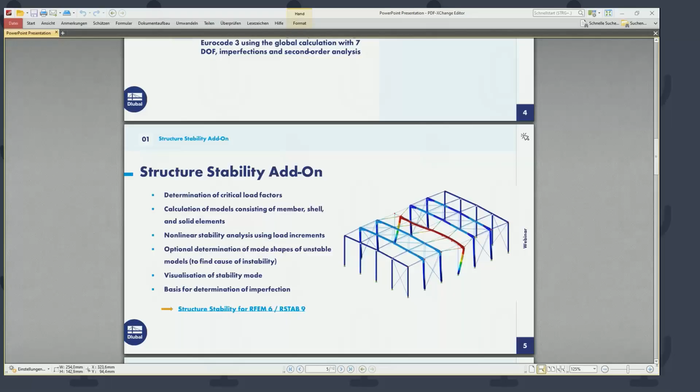Okay, thank you, Andreas. So we will start the presentation, and first I want to present the content overview. We are talking today first about the determination of the critical load factor using the structure stability add-on in RFEM. Then the second topic will be the consideration of cross-section warping in the global calculation using the torsional warping add-on for 7 degrees of freedom. And we also want to talk about lateral torsional buckling analysis according to Eurocode 3 using both add-ons in the global calculation, with 7 degrees of freedom, imperfections, and second order analysis.

So the first thing we want to look at is the structure stability add-on. Here's a short overview of the features of this add-on. We can use it to determine critical load factors for our structures and also calculate models consisting of member, shell, and solid elements. In this webinar I'm going to present members in the structure stability add-on, because we also want to show the combination with the 7 degrees of freedom calculation. I think shell elements and solid elements will be part of another webinar in the future.

Another feature of the structure stability add-on is the nonlinear stability analysis, using incremental loading to also calculate nonlinear systems. There's also an option which will help us determine a mode shape of an unstable model so that we can find the cause of the instability. We will look at this in the webinar today. We can also have a graphical representation of the stability mode shape and use it as a basis for the determination of imperfections.

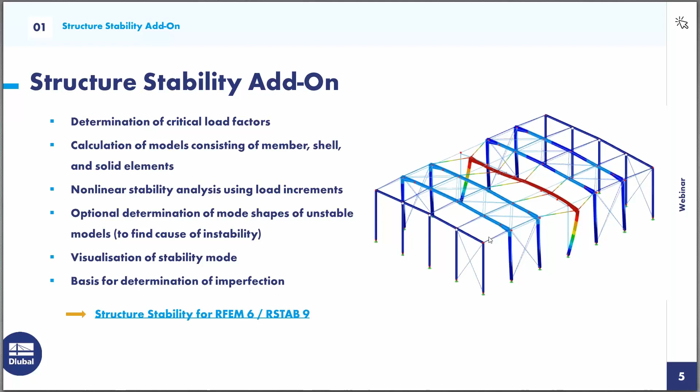In the first example, I want to use a simple example in RFEM to show you the basics of the input for the structure stability add-on, and which results we will get from the calculation. So I will switch to RFEM and we will have the first example. It's a very simple example in this case: a simple steel frame.

We have rigid frame edges and simple supports, and now we have one loading condition: vertical loading and a horizontal load. We want to look at all the settings that are necessary to perform a stability analysis with this structure stability add-on for this example.

First, if you want to use the structure stability add-on, we need to activate it in the base data dialog. So I go into the edit model base data dialog, and there we have a tab for the add-ons where we can activate the add-on structure stability. You've probably noticed that in the main tab of the base data, we have chosen the model type 2D.

So if we have chosen only this 2D model type, the structure stability analysis will also be performed in this 2D plane stress environment. So we will see in the first step only mode shapes for this 2D structure.

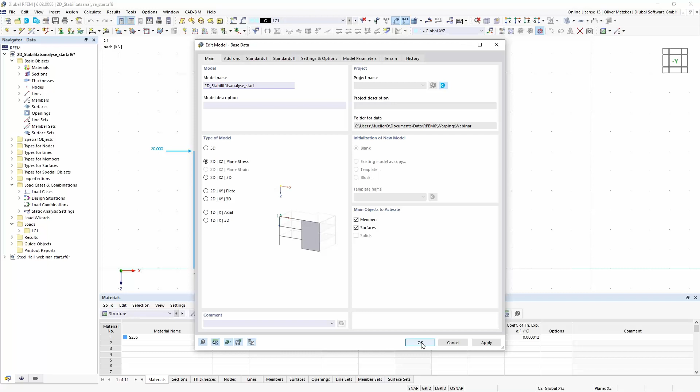Okay, so now I have activated this add-on, and we will see that in the navigator for the data, we have an additional stability analysis setting. Without the stability add-on, we don't have this setting, but now it's here with already two predefined stability analysis settings.

If we open the first one by double-clicking on it, we see that in this stability analysis settings, we can set all the options that we want to consider for our stability analysis. So we have as an important choice the stability analysis type.

We have this linear eigenvalue method for determination of the critical load factor, and also this incremental method for calculating nonlinear systems. In my example, I only want to use this standard eigenvalue method for the linear system, and I don't want to change the other options for now.

When we have our stability analysis setting, we can also assign it to our load case to start the structure stability analysis. So I can edit my load case number 1 just by clicking this Edit Load Case button, and then we see that if we have this stability add-on activated, we have an additional option here in the options, Calculate Critical Load Structure Stability Add-on.

If we activate it, then we can here choose in the drop-down list our corresponding stability analysis setting that will be applied for our stability analysis.

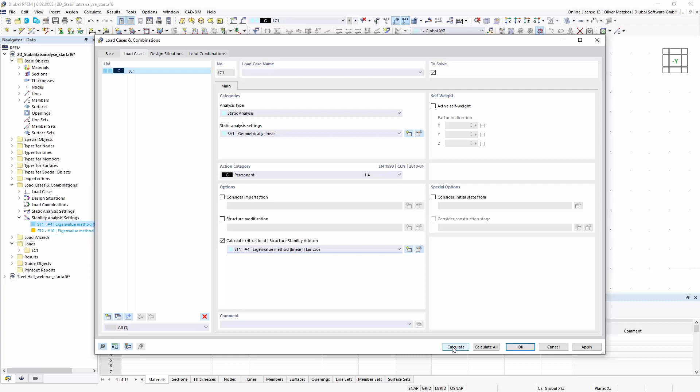If I calculate now my load case number 1, then we will see in the calculation diagram that first the static analysis is performed of load case number 1, and that is used as a basis then for the stability analysis. When we have calculated our load case number 1, we will get the internal forces, support reactions for the static analysis, and we can also switch to the results of the stability analysis.

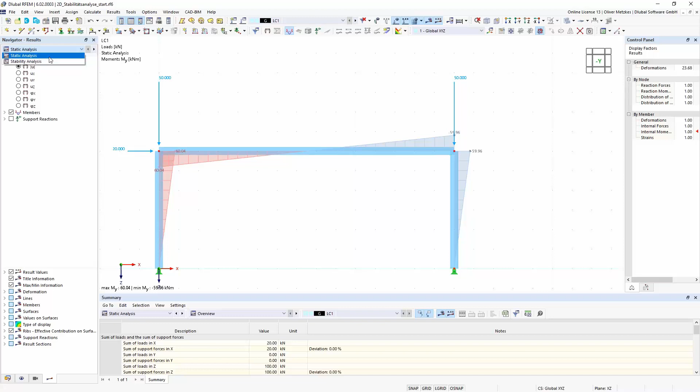In the navigator for the results, we have this drop-down list where we can switch between static analysis and stability analysis now. If we switch to a stability analysis, then we will see the graphical representation of the mode shape, and by default for the members it's represented by those line display.

We can also choose the display mode. Here in the navigator for the results we have options at the bottom, so if I choose to display my deformations for the members by colored sections, then I will also get this colored representation with the sections. That is mostly easier for the imagination of the mode shape.

I also get the results in the tables. So in the result tables for stability analysis, I will now see my critical load factor corresponding to the first mode shape. For this example, the first critical load factor is at 33.6. That means that if I multiply my load case number 1 with 33.6, then I will have the stability failure with this mode shape of my simple frame.

Okay, so that is the result that I get, and I also get further mode shapes according to my setting that I have set in the stability analysis settings.

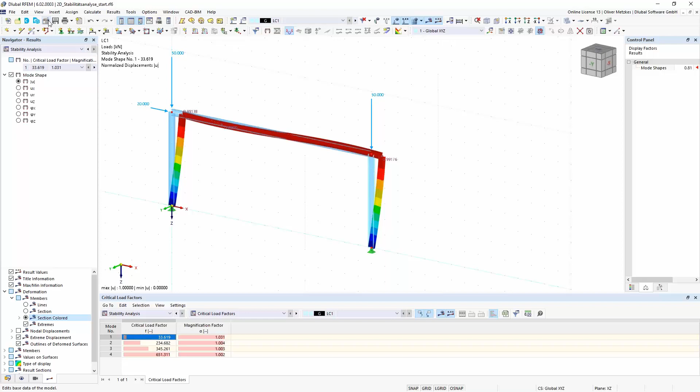Now, I have said that this is only a 2D structure. So the first mode shape is this in-plane flexural buckling of the frame, and I don't get any out-of-plane buckling shapes. If I also want to consider the out-of-plane buckling, then I can go into my base data dialog and change the model type to 3D.

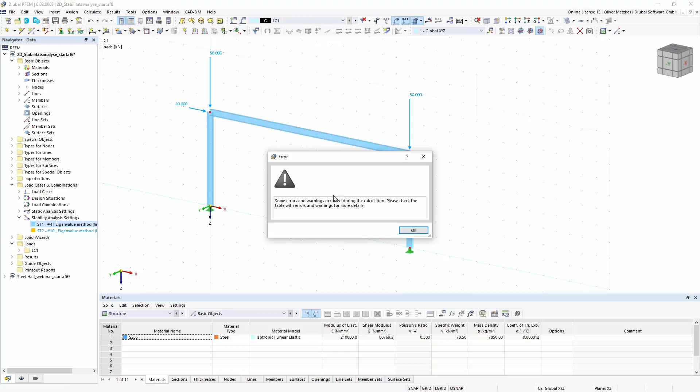I will do so. Okay. And then I can also just try to calculate it again. And then I will see I have not changed anything with my support conditions. So the result of the calculation in this 3D model environment now will be that there's an error because the structure is unstable.

So for my easy structure, it's very easy to determine the cause because I have not changed my supports. So I have the simple supports here, but I don't have any support in the out-of-plane direction. So for this case, it would be easy to say, okay, there are supports missing.

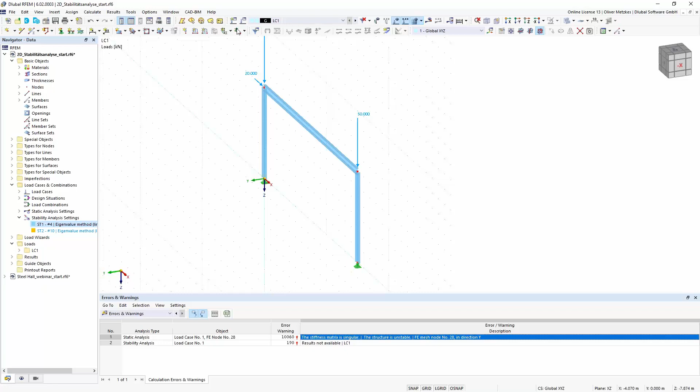But also if you have more complex models and you get this error for instability, the structure stability add-on can also be helpful. So as I have said in the overview, there's another option. If we go into the stability analysis settings, we have this option for the calculation without loading for instability check by mode shape. We can use this method if we think there may be an instability due to modeling issues, if maybe you have forgotten a support, or also if you have nonlinearities.

Okay, to check if it's maybe a modeling problem that your structure is not stable, like it is, for example, in this case. And as a result, you will get the mode shape of the unstable structure, and then you can easily see what the problem is.

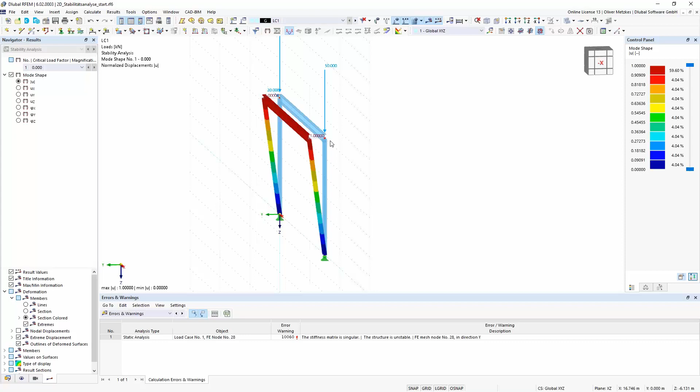So in my case, yeah, I don't have any support in the out of plane direction, so I will see that the frame will have a high deformation, and so there won't be any restraint, and it will not be a stable structure that can be calculated.

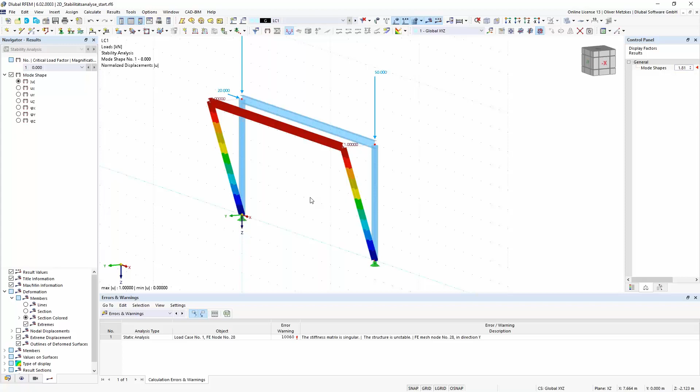This option is in the structure stability add-on, which can help with modeling issues involving instability. In my case, I just wanted to place some supports here, in the Y direction at the frame edges. So I select the Y direction and assign it to my frame edges, here and the other one.

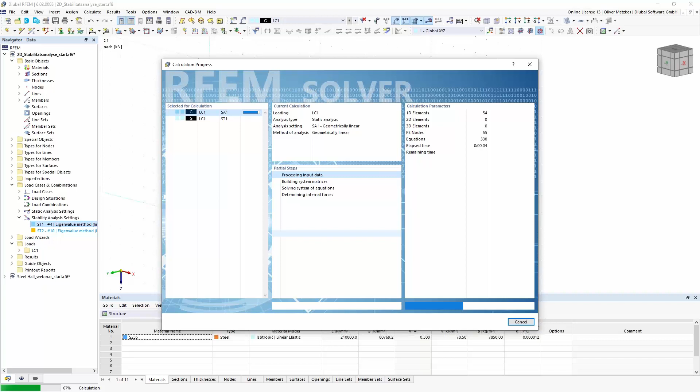Now I can change the setting back so that I calculate my mode shapes with loading to get the corresponding buckling shapes. I will calculate it again, load case number 1, now also in the 3D model environment, so I would expect to get out of plane buckling shapes as well.

I switch to stability analysis results, and now I see that the first mode shape is no longer the in-plane buckling, but out of plane buckling for the beam and also for the columns. For example, for this column, I now get this mode shape for out of plane flexural buckling with a critical load factor of 13.

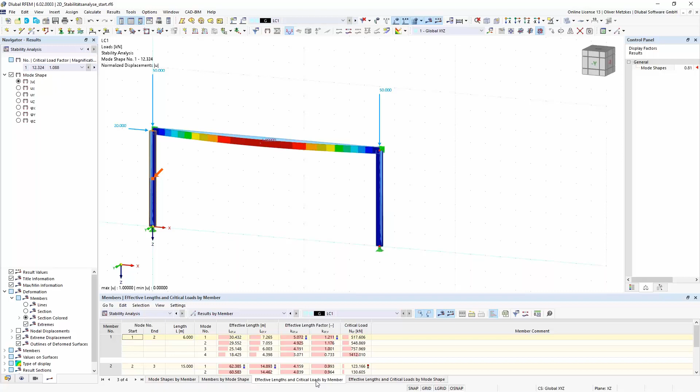The result of the stability analysis add-on is not only the critical load factor and mode shape, but also the calculation of critical loads and buckling length. If we go into the result table, results by members, we also get additional tables like effective lengths and critical loads by member. Using this load amplifier, the stability add-on automatically calculates critical loads for each member and determines effective lengths and, corresponding to member length, effective length factors.

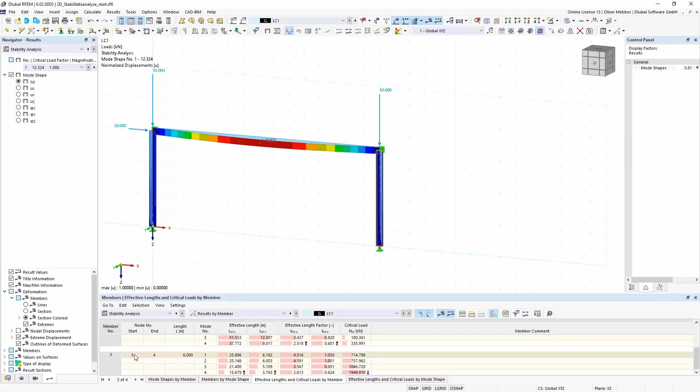For example, if we want to look at the effective length of this column, I click on it - it's member number 3 - then we have to look at results for mode shapes where this member is affected. Mode shape number 1 is for the beam, but mode shape number 2 is for out of plane buckling of this column.

As it is out of plane buckling, it would be buckling around the weak axis. We can display the axis system, so buckling around the z-axis, and the corresponding principal axis would be the v-axis. So we look at member number 3, mode shape number 2, and L critical V - an effective length of 6 meters, with an effective length factor of 1.0. That's as expected, since the critical length for this column with hinged support conditions at start and end would be the member length.

So this is the effective length for buckling around the weak axis. Buckling mode shape number 4 is still the in-plane flexural buckling, for buckling around the strong axis. So member number 3, mode shape number 4, and now it's L critical for the U axis - around 16 meters, with an effective length factor of 2.6.

These values could now be used if we want to perform stability design checks according to the equivalent member method, using these effective length factors for further design. So we get from the stability analysis result mode shapes, critical load factors, and effective lengths for the members - I think that's good. We've seen all this input on this simple example, and now I want to give you some hints about the behavior of the stability analysis add-on in a 3D model.

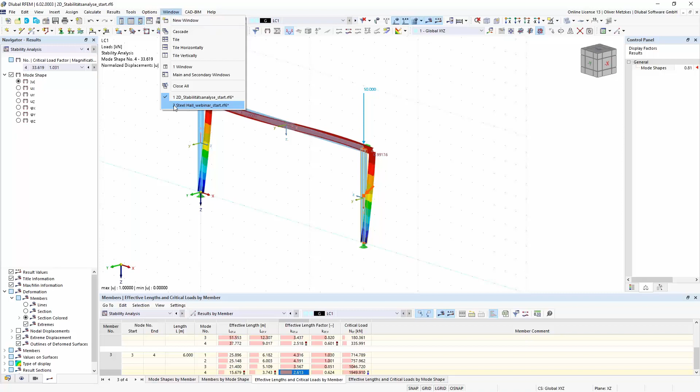So now I switch to my next model for this webinar. It's a steel hall with simple frames, rigid frame edges, simple supports, and a certain loading. I've simplified it a bit, so I only have self-weight and snow load, and wind loads only for one direction - I haven't considered the negative ones, for example. It's a bit simplified, but I think for our example today it's a good one.

Now you can also calculate critical mode shapes with the stability add-on for this 3D structure, with consideration of all the structural elements. So the whole structure is considered, and you don't need to consider any spring stiffnesses for members that aren't included, like the bracings - it's already considered in this 3D model with its corresponding stiffness. So we can have a look at it.

First, we would need to activate the add-on in the base data dialog - add-ons and structure stability.

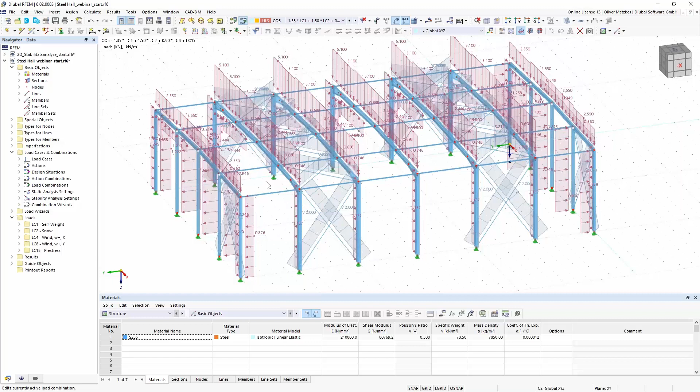Now we also have the stability analysis settings in here, and we can assign it to our load case. So if we want to determine the critical mode shape, we can select a load combination where we think we have the most governing load, like combination number 5. I can also activate this calculate critical load option for the structural stability add-on, so we can assign this setting to load combinations and not only to load cases.

So now, again, first static analysis of the load combination, then stability analysis using the internal forces that have already been calculated. Now we see mode shape number 1 for the critical load factor of 18 in load combination number 5 is displayed here.

So now that's only one load combination. For a structure with lots of load combinations, it would be interesting to find out the one that would be the governing one for the stability analysis. So the wish would be to analyze the stability of all the load combinations and not only one. That is also possible.

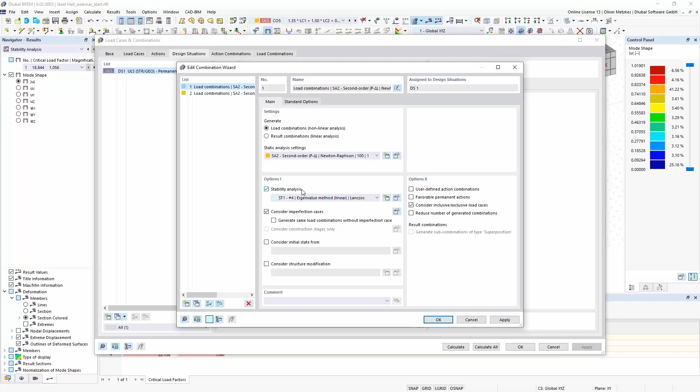We can go into the combination of the loadings, so design situations. As you probably already know, all the rules for the combinations are set into this combination wizard. We can also modify the combination wizard, and there's an option for stability analysis. With the activation of this option, we can also activate the stability analysis for all our load combinations created by this combination wizard.

So I will activate stability analysis and recreate my combinations. I set it here again. They are recreated, and we see now every load combination will have this calculate critical load option activated.

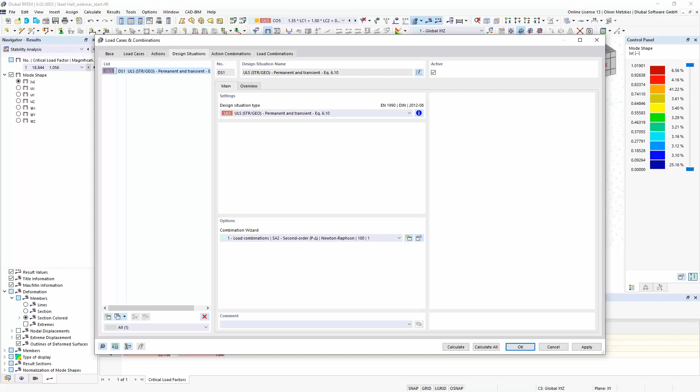If I now calculate my design situation number 1, I will get all the results of all the load combinations, so all the combinations will also be calculated by stability analysis. In the results, I don't have to look at each combination one by one, but I also get the results of the most critical load factor.

So we will also look at this result in the result tables. If I am in my design situation, in the summary of the static analysis, I will also have this additional line of minimum critical load factor. Now we see the most governing one is my load combination number 6, with a critical load factor of 11.1. Then we can look at combination number 6 and the results for the stability analysis.

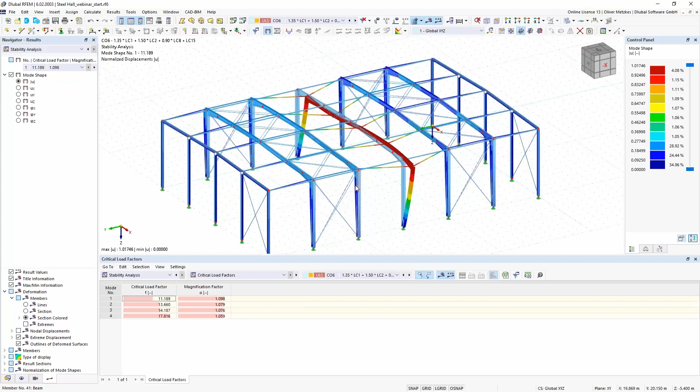And we will see that it's also this mode shape for in-plane flexural buckling. So that is the most critical stability issue for my load combinations present in design situation number 1.

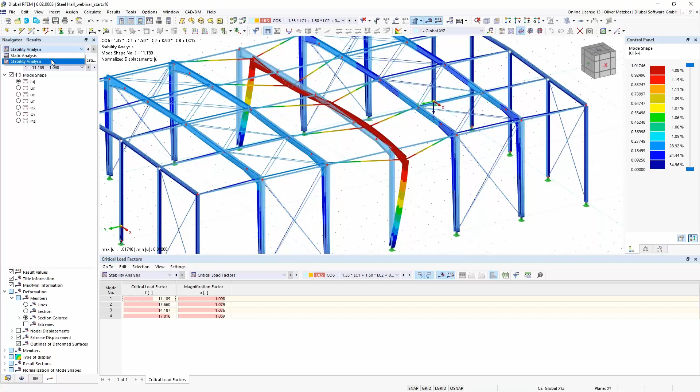Okay, if we look at this mode shape, we see it's in-plane flexural buckling. But when we look at the internal forces, we know that from our loading, so snow load, wind load, we also get a bending moment My. So we would also expect a lateral torsional buckling problem of our main beam, but we haven't seen this mode shape from the stability analysis.

The reason is that in our standard RFEM and RSTAB calculation, we only have this 6 degrees of freedom solver implemented. So for the stability analysis, we can cover flexural buckling, but we don't get the mode shapes for lateral torsional buckling if we don't have the additional add-on activated for the 7 degrees of freedom.

For a short overview about the possibilities, I want to show another page in the PowerPoint, okay, and we want to have a look at the stability failures of the members.

So as we already know, we have this problem or stability issue of flexural buckling. We have a compression force in the member, and as a stability mode shape we get this lateral deformation. There we have the critical loads, critical for buckling around the principal axis or the geometrically axis, so strong and weak axis, the flexural buckling mode shape.

But there are also other stability issues. We also have the torsional buckling mode, mainly an issue for cruciform members, for example. As a stability mode, we will get just the deformation around the longitudinal axis, so no lateral deformation.

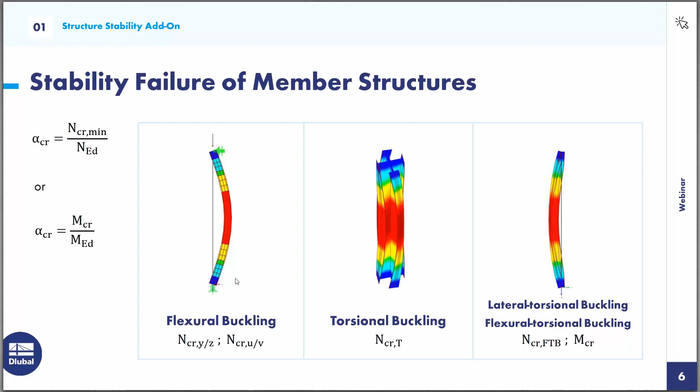So that leads us to our next topic, the torsional warping add-on, 7 degrees of freedom. In general, we can use this add-on to consider the cross-section warping as an additional degree of freedom in the calculation of our member elements. We can use it also in combination with the structure stability add-on, so that we can determine critical load factors and mode shapes for stability mode shapes like torsional buckling or lateral torsional buckling. The whole add-on is fully integrated in the programs RFEM and RSTAB.

Possible applications and use cases of this add-on are listed on this page. We can use it for all thin-walled cross-sections where we have intended high torsional moments, for example craneway girders, where we want to consider the torsional load so that we have primary torsion and secondary torsion. Then it's also used, this 7 degrees of freedom add-on, for the calculation of lateral torsional buckling according to the standards for non-doubly symmetric cross-sections.

For example, for channel sections, we can't use the equivalent member method according to Eurocode 3. So we would need to consider the lateral torsional buckling problem by using second order analysis with 7 degrees of freedom and also consideration of imperfections. We will also look at this problem of the lateral torsional buckling check later. And we can also use this add-on to consider it in the stability analysis of the global model so that the stiffness of all the connected structural elements is considered correctly.

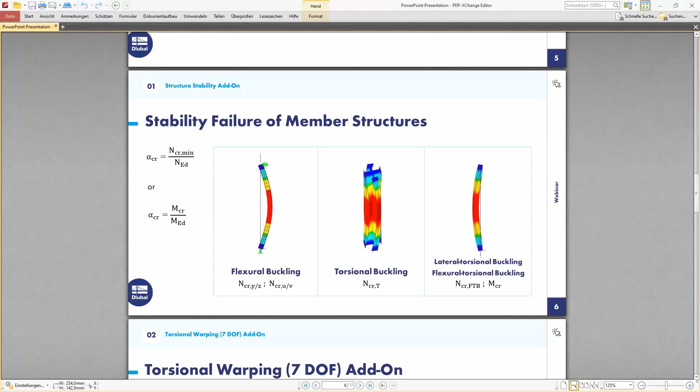Okay, now I want to begin with a very simple example. The example I want to show now is a craneway girder, which I want to model in RFEM 6, and I want to show all the necessary input for the application of this torsional warping add-on. So I just want to create a new file, it would be this craneway girder, and I want to activate the add-on torsional warping.

Maybe I will go back to the main tab, because you see I use now the model type 3D. If I want to use a 2D model type, for example, then I can't activate this torsional warping add-on, because if you want to consider the 7th degree of freedom, then it's already a 3-dimensional calculation method of the members. So we would need at least this 2D/3D model type, or the 3D model type. If you have only 2D, then torsional warping is not available. So now we use 3D model type, and then we can activate the torsional warping.

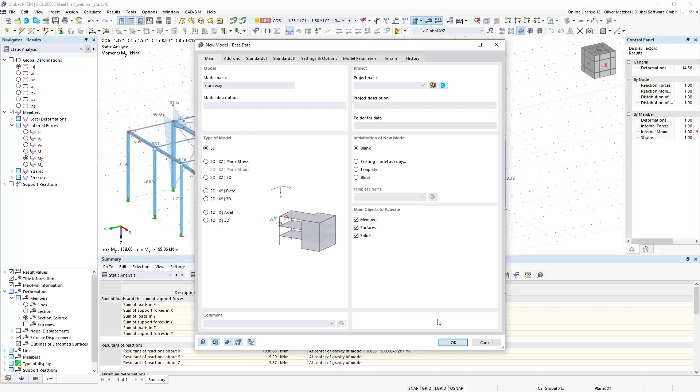As I want to calculate a craneway girder now, I also changed the load case classification for the cranes. In this example, I don't want to deal with all the necessary design checks for the craneway girders, so we don't have them implemented yet in RFEM 6 - no fatigue design checks, for example, and we also don't have this moving load situation. That will be implemented later. But now I only want to show this example because then we can look at all the details for the calculation with the warping torsion add-on, because we will get these torsional moments inside our craneway girder.

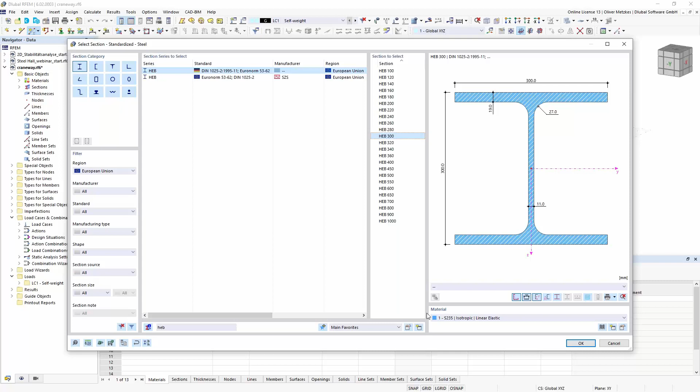Okay, it would be a very easy example for the beginning. So we will start also with an I-shaped section. I want to have an HEB 300, so I just select it from the library, and I use this search function at the bottom to have it only in my list, then HEB 300. For the material it should be an S235, that is already okay with the default material for me. So I confirm the setting and create my member. I want to have it with 12 meters of length, so I can just pick the points of this line grid here. Okay, so that is my member, and now I want to place supports - I want to have also a torsional restraint at the beginning.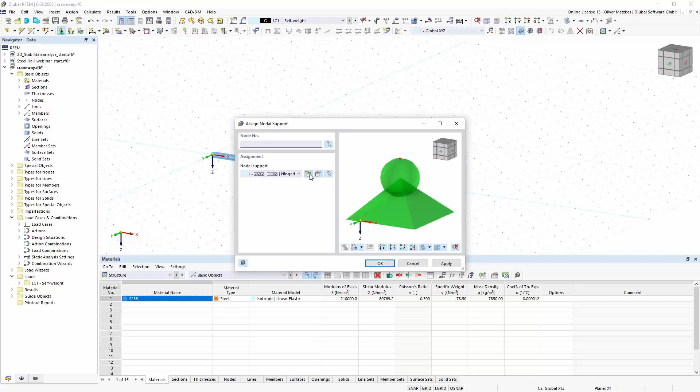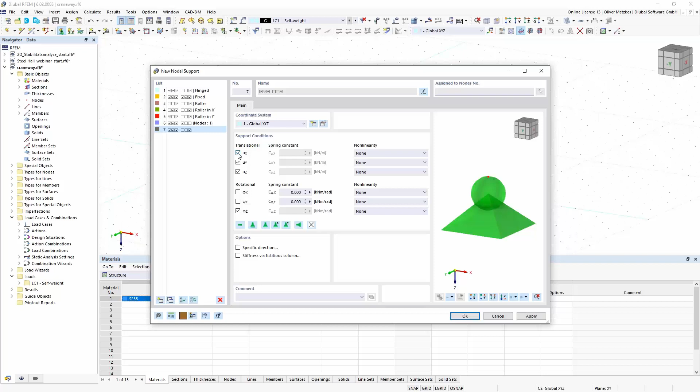Okay, so all the deformations and also the rotational restraint around the x-axis, and also another support at the end. So it will be the same, but now I don't have this longitudinal deformation fixed.

I also want to consider an additional support in the middle, so it should be a two-span beam. And now I use this function of dividing the member.

So I right-click the member, then in the members I choose this divide member by intermediate nodes. I can select one intermediate node, and now I want to use this option, create on member nodes without dividing the member. That is important for the warping torsion analysis, because only if the member is considered as one member without division, then also the torsional warping will be continuous in this member.

So if I would divide the member, then those two members would be independent. We will later also look at this problem, and there are also solutions for that. But for now, I want to use this option to create only the nodes on member.

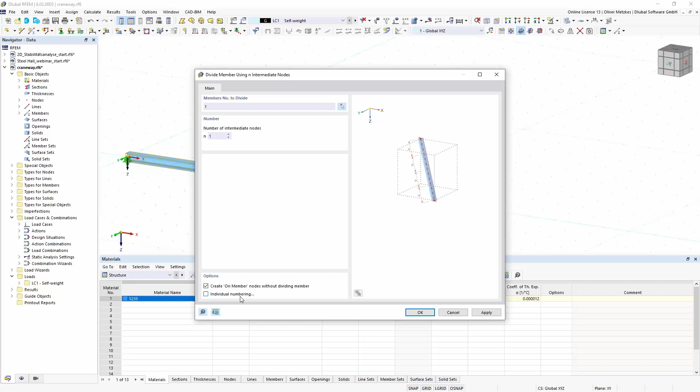So now I have this node on member, and I also want to have another support here, so I just copy this one also to the middle. Okay, so that is my beam and also the support conditions.

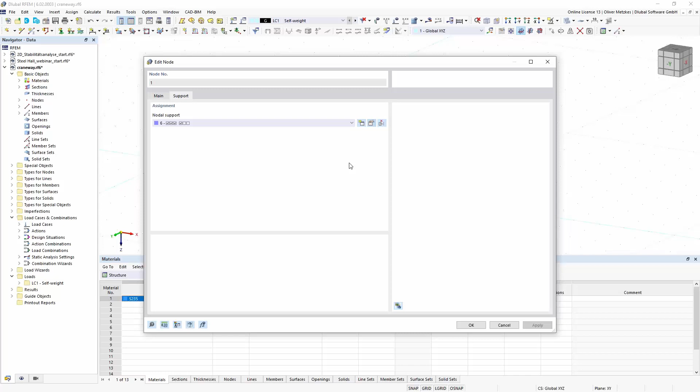And probably you have noticed that in the support conditions, even if you have activated 7 degrees of freedom, we only have this 6 degrees of freedom for the support conditions. So in our calculation, we only have this torsional warping degree of freedom for the members.

So it is seen just as a member problem, and also as a member property, we would need to define warping restraints, for example. So the nodal supports, they could also be used on surfaces, for example. So we have decided not to offer the warping restraint as a nodal support, but as a member property, because it's also only valid for the members.

And for this, we can edit the member, and then we have this transverse stiffeners. So this additional type is used to place transverse stiffeners for the design and also supports for the warping torsion analysis. So as it's always in RFEM 6, we have this additional tab, and now we can create types

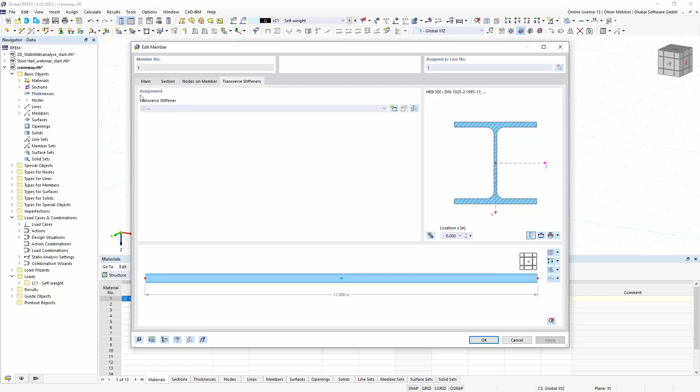of transverse stiffeners, which could then be assigned to the different members. So now we have this new type of transverse stiffener, and we can see as a stiffener type, we can select between different options. So we can place, for example, end plates at start at end, or also flat stiffeners, and also the warping restraint.

So in my example, I just want to place a full warping restraint at the beginning and at the end, and that is possible using this warping restraint option. There's the user-defined restraint also available, but I want to use the full warping restraint here.

I set one at the position of 0 and then a second one at the end. So I use the relative input by clicking on this button, and at 100% of the beam length I will have the second full warping restraint.

I also want to add a flat stiffener in the middle where I have my other support. So at 50% I have my flat stiffener with a certain material and thickness, so 20 millimeter, and also the width of 120 millimeters. You see that automatically the program calculates the resulting warp spring that will be used in the analysis. So from the input of the thickness and the width, we will get automatically with the cross-section properties the warping spring that will also be considered in the analysis.

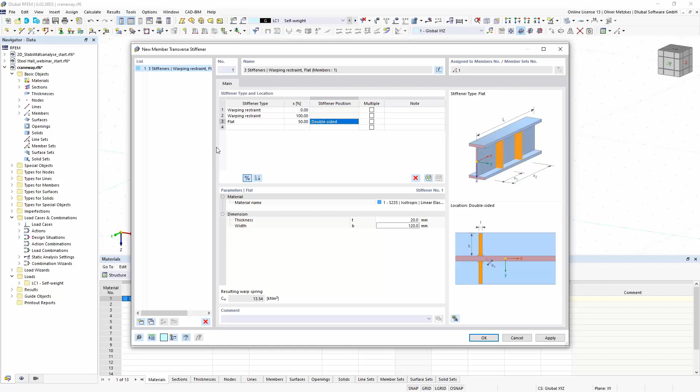So you can use this type of member transverse stiffeners to set all the warping restraint conditions for your member. Okay, we also see a certain graphical representation. So this is the full warping restraint, and here we have our stiffener placed in the middle.

Okay, so now we have our system, and we would need some loading. And in the load cases, we already have created this load case number 1 for the self-weight. And the self-weight is applied automatically by using this self-weight factor in the Z direction.

By default, if we have switched to warping torsion analysis, all the loads are applied also in the center of gravity. So also the connection between all the adjoining members and the supports, they are assumed in the center of gravity. And also the loads by default are applied in center of gravity of the cross-section. So that is a difference compared to the standard 6 degrees of freedom calculation in RFEM. So there we always apply the loads in the shear center.

But now for warping torsion calculation, this additional torsional moment is important, so now it's really applied in the center of gravity. We have already our self-weight loading, and now I want to also create some crane loading on my beam. As I have said, we don't have this moving load implemented for now.

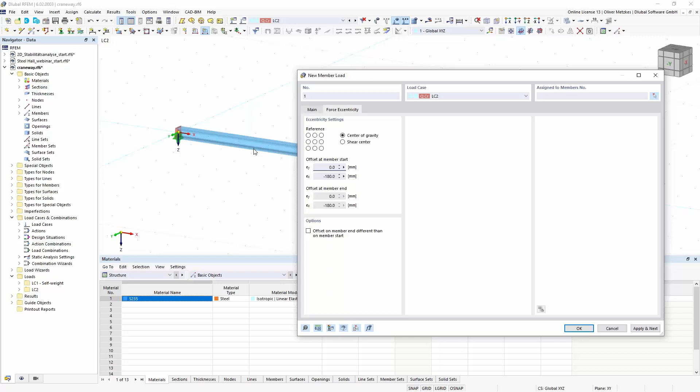If it's just a simple case like top flange or bottom flange, then I could also use this simple reference point. So the middle one is the center of gravity, and then we have the upper left edge, for example, or the lower center point. We can also directly apply it using this reference point. But as I have an additional eccentricity, I just type it in here as a value, negative because the local z-axis is going downwards.

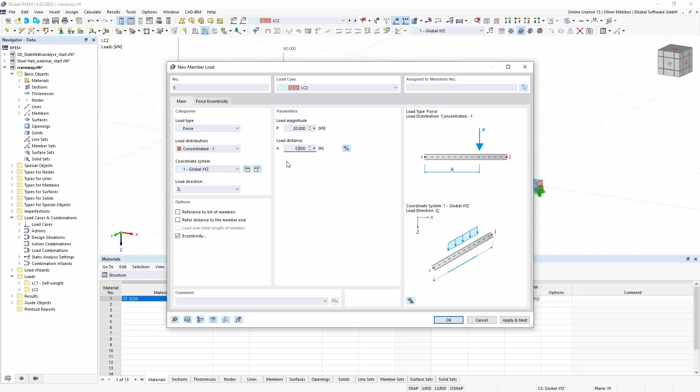Okay, I can just apply this load at member number 1. And I could also apply another one, for example, a horizontal load. So just one load with 20 kilonewton at the same load distance, now in the y direction, still with the same eccentricity. Okay, so I apply it to my member. So I can create the load manually like this.

So now I would need to copy the load cases because I want to have it moving, and then also change the distances for the first loading point and the second loading point. So that would be possible, but it's quite a bit of work. So I want to use another possibility here.

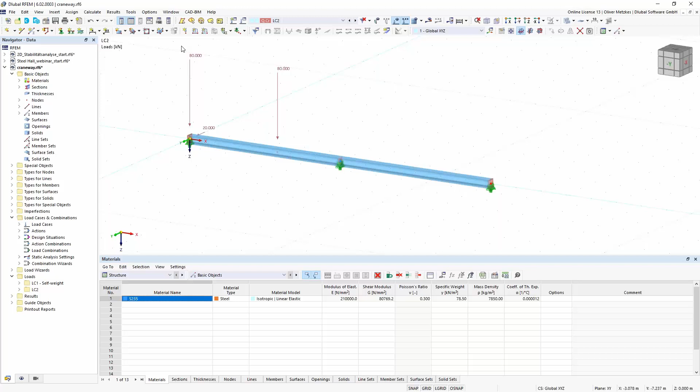You have probably seen in the previous webinars that now in RFEM 6 it's always possible to use JavaScript code for the creation of the model. So if you activate the script manager, we have it here in the list, you will also get example scripts for this creation. For example, in the examples we have a simple beam one. If I just open it with the text editor, we will see there are also examples for creation of materials, how to create a node or a member.

And for our case now, the important thing is the creation of a concentrated member load. So you see we can create this member load by JavaScript code, also set this load distribution as concentrated, the direction, for example, and a certain load magnitude. So basically all the options we have in RFEM, they are also available in the scripts.

You can see all the options if you also open the console, we have it here with a small info button. And if we click on it, we will see all the objects and all its properties. So in our case, for example, it's a load case, and we have also member loads inside. So it is here, and then you see we have all these options available, so all the distances, also eccentricities, and you see how you can apply it in the code. That is always good if you need to find a certain property and about how to set it.

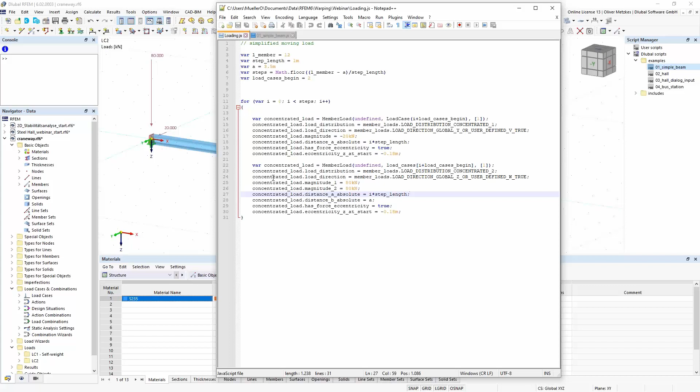And then it's relatively easy to create this JavaScript. So from this simple beam, I have created another one for my simplified craneway loading here. I have certain input data with a distance between it, and then I set my concentrated load for the horizontal load with my eccentricity of 180 millimeters, and then also this concentrated load in vertical direction, as I have done manually, but now it can be done by JavaScript. So then I have this for loop that creates automatically the load cases and the loads in each load case. I think that is a very easy method, and it's not too complicated with this simple code snippet.

And to apply it, you can just copy it here into this console. So just copy it and paste it.

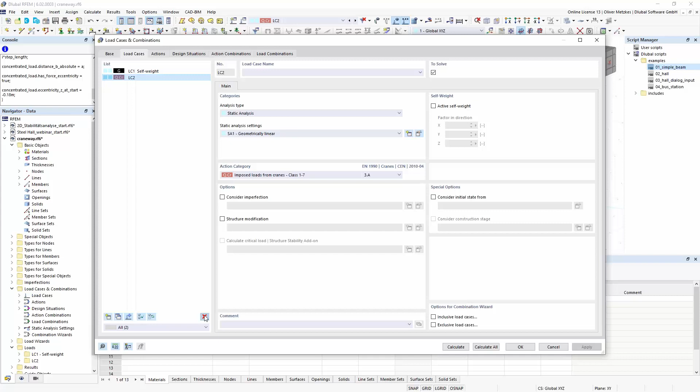Before applying it, I want to delete this load case number 2 again, because it will be created by the script. With the return key, I can just start the script. Now you see in my load case list, I have created those additional load cases with my member loads. If I click through them, you see it's this moving load, which I have simplified, applied by this JavaScript code.

So that's also an easy solution. If you have things that you want to automate, which are not implemented by default in RFEM, you can also use JavaScript to create the objects. Okay, now I have my load cases, and I want to change the action category for them.

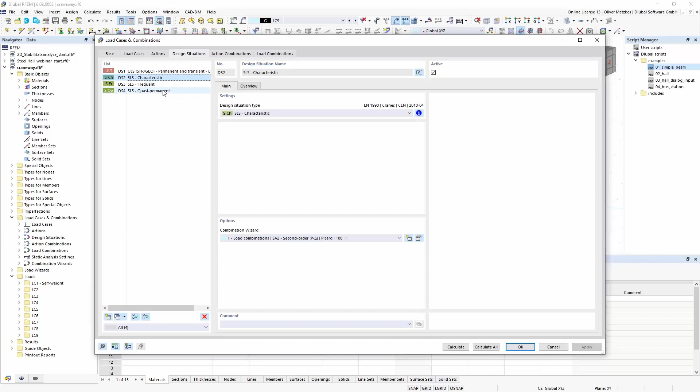So it's from the cranes, and they are alternative loadings. So I will just change this action type to alternatively. Then we have our design situations and the combination rules. I think you already know that from previous webinars, like the steel design one. So in this example, I don't want to show it in detail, and I also don't want to look at the design situations for the deformations, but just for the ultimate limit state.

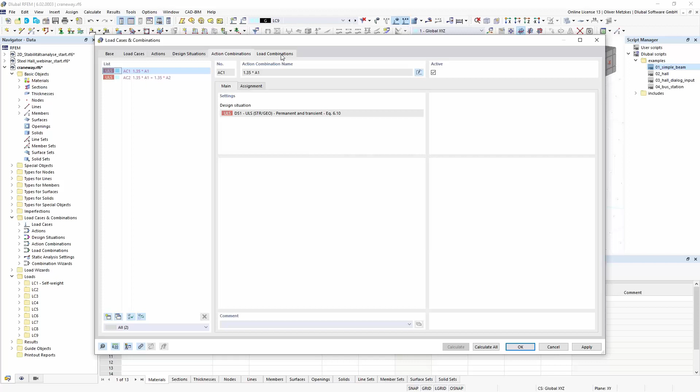Okay, now I have created my load combinations. So for each load step, I will have this combination. If I now calculate this design situation, I will get the results for my load combinations with the warping torsion analysis activated. So we will have a look at the results.

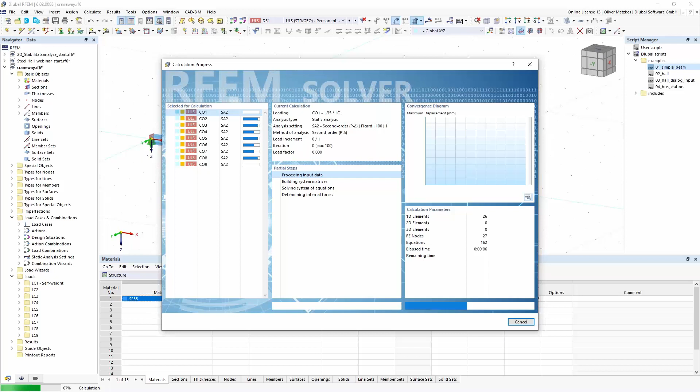And now we also expect to get the torsional moments correctly. So primary torsion, secondary torsion, we will get it here in the result navigator. In the internal forces, you will see we have these additional choices. So the bimoment, for example, and also primary torsion, secondary torsion.

Okay, so now we have calculated our load cases, and that could be used now for the steel design, for the cross-section design, without the stability analysis. If we now also want to perform our stability analysis, so in this case it would be a lateral torsional buckling check, we want to consider also the torsion correctly, so we would need this add-on with 7 degrees of freedom, a calculation according to second order theory, and also the imperfections.

So that would be then our lateral torsional buckling check. So in this case, I want to create the imperfections from the stability add-on. I want to use the mode shape and scale it to a certain value so I can easily create my imperfection. So we'll close this script manager again. Okay, and now activate also the stability analysis add-on. So now in the add-ons, structure stability.

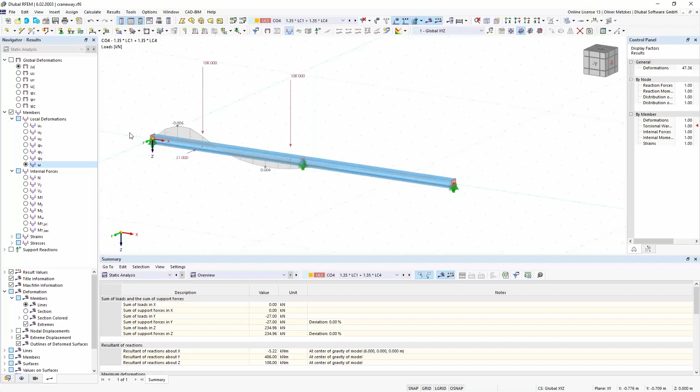And now I could also analyze all my load combinations, for example, look at all the mode shapes and scale them to a certain imperfection value. But in my example, it would be easier to create this imperfection out of a mode shape, for example, of my self-weight load case, because then I would have this symmetric mode shape which I would need for my imperfection value. So in this example, I just want to apply it for this self-weight.

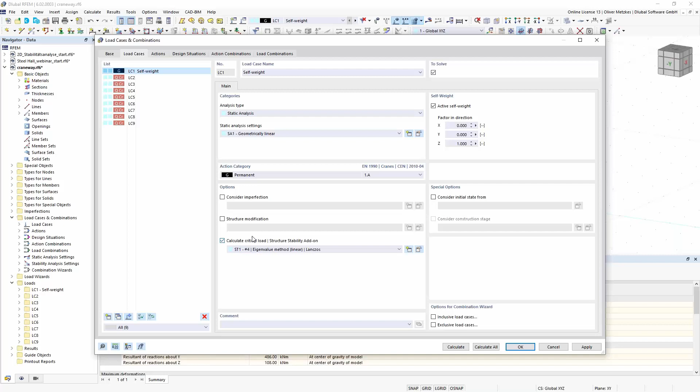So I activate this option, calculate critical load, and then calculate my load case number 1. And as we have now activated the torsional warping add-on, we now also expect a lateral torsional buckling shape. So not only flexural buckling, but we will see it here if I activate the deformation by colored sections. Okay, and then we see now with the 7 degrees of freedom add-on, we get this lateral torsional buckling shape. And now I want to use this one to apply it as an imperfection.

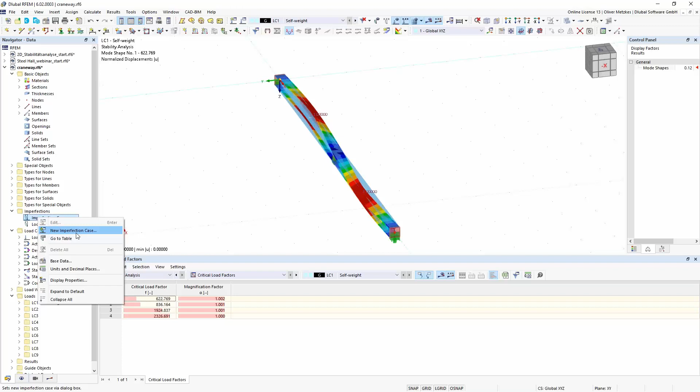For that, I can go into my navigator data and create a new imperfection case. So in this imperfection, I right-click the imperfection case to create a new one. And if we have the stability analysis add-on activated, we also have the imperfection type of the buckling mode that we can use. If I create imperfections from a buckling mode, I first have to select the load case. So in my example, it's load case number 1 and also buckling mode number 1.

And now I need to set the imperfection magnitude. So for our lateral torsional buckling design check, the standards are giving also imperfection values. So in the Eurocode 3, you will also get imperfection values for flexural buckling and also for lateral torsional buckling. And now you could also apply this imperfection.

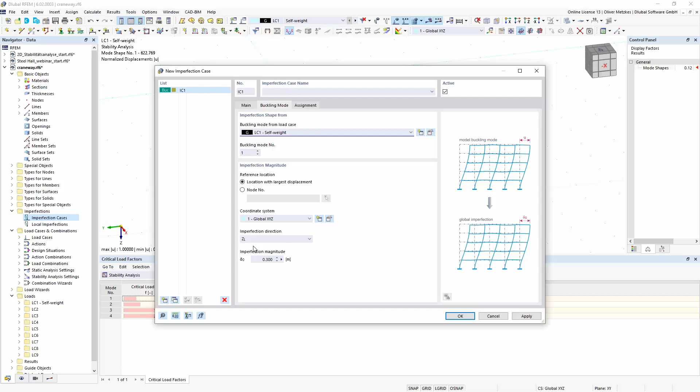In my example, as an imperfection value, I can use 1 per 200 of the reference length, which would be between the fork supports in this example. So this length and 1 per 200 of this length will be the imperfection value I would need to use here. It also depends on the national annex for the Eurocode, so it's always important to look at your country's national annex to set the correct imperfection magnitude.

So if I want to set it here, I choose the imperfection direction in the Y direction, and then I could manually calculate the imperfection magnitude, or again, I could use the formula input, and also in these formulas, JavaScript code is allowed.

Now I can also get the properties of all the RFEM objects, for example from my members, it's member number 1. I can also get the length information here, so it was 12 meters. And now I want half of it because the support is in the middle, and 1 per 200, so this imperfection magnitude would be the value I should use.

And if I now change the member length, this value would also change because it's defined by the formula.

In my example, I would also need to check the imperfection in the positive or negative direction, depending on the load case which I analyze. And as I want to analyze all my load combinations, I want to also set this imperfection in the negative direction.

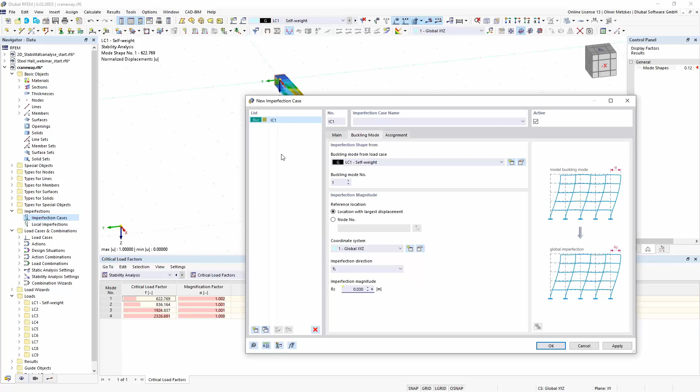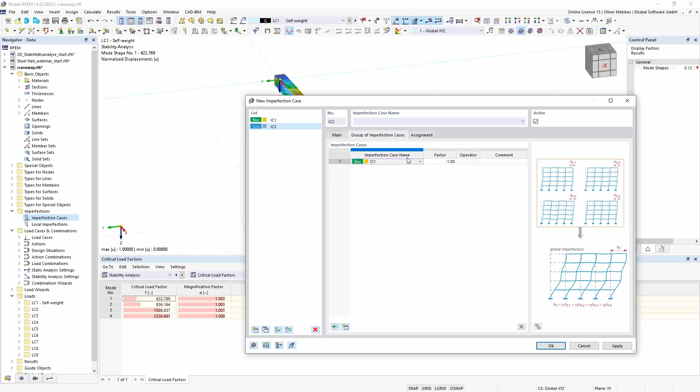That can also be easily done using this group of imperfection cases. This imperfection type can be used, for example, to combine different types of imperfections. So if I have a global initial sway imperfection in the x direction and want to combine it with local imperfections like one from a buckling shape, I can do so in this group of imperfection cases just by adding additional lines and setting a certain operator. But in this case, I just want to use my imperfection case number 1, but with factor -1, so that it's in the negative direction.

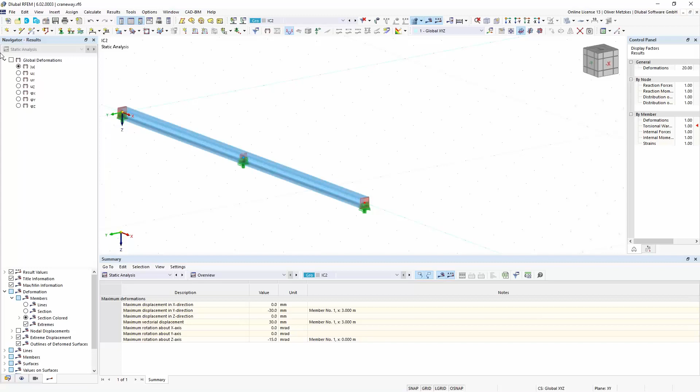I can also display the shapes of the imperfection cases. So if I just calculate this imperfection case number 2, it takes the mode shape of load case number 1, scales it to the value, and as we have the negative factor, we will have it in the negative direction. Then we can look at the results for the global deformations.

So this is my imperfection shape now in imperfection case number 1, and in imperfection case number 2. Now I can also calculate it for number 1, and you see it's just the opposite direction with the imperfection magnitude I set in imperfection case 1 and 2.

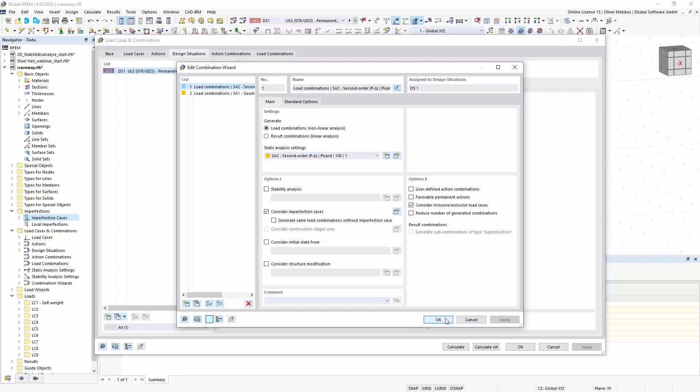I can now use the imperfection in the combination. So in my design situation number 1, if I look at the combination rules in the combination wizard, I can activate my imperfection cases here, and they are then also considered in the combination. So if you look at the load combinations, we see we now have the same loading one time with imperfection case number 1 and then imperfection case number 2, for all the load cases.

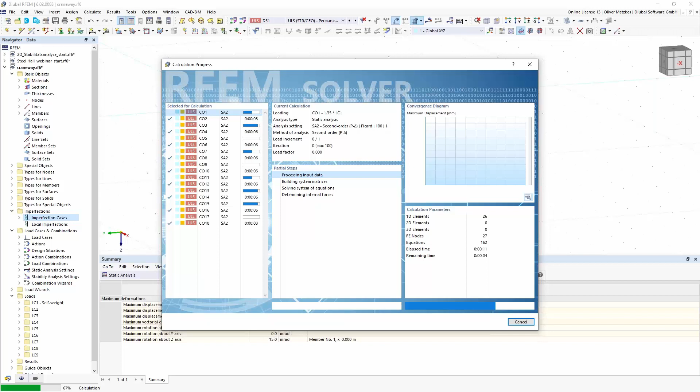Now if I calculate this design situation number 1, I will get the internal forces calculated by second order theory with the imperfections and also the warping add-on activated. So I could use these internal forces in a cross-section design check, and that will replace my stability design check for lateral torsional buckling. That is possible according to Eurocode 3, and then I could use those internal forces.

So all the internal forces I get now in this design situation number 1 can then be used also, for example, in the stress-strain analysis add-on or also in a steel design add-on. I want to show that now.

So if I just activate my steel design add-on in the base data dialog, it's also a good idea to just save the structure first. So okay, I just saved it, and then I activate my steel design add-on, and I can look also in the input tables.

I think you already know this input from the steel design webinar. So we have our design situation where all our internal forces are considered, then objects to design, materials and sections - that's automatically taken over from the RFEM definition. And the important thing now for our cross-section design check, if you want to use it as a stability design, we need to look at the ultimate configuration.

So if we go inside here, we can activate this option: we want to perform the stability analysis with the second order internal forces. For that, we need the partial safety factor for stability design. Normally, cross-section design checks are performed with the partial safety factor gamma M0, but for stability design checks we need the gamma M1 partial safety factor. Depending on the national annex, this factor can be different, so we need to activate this option.

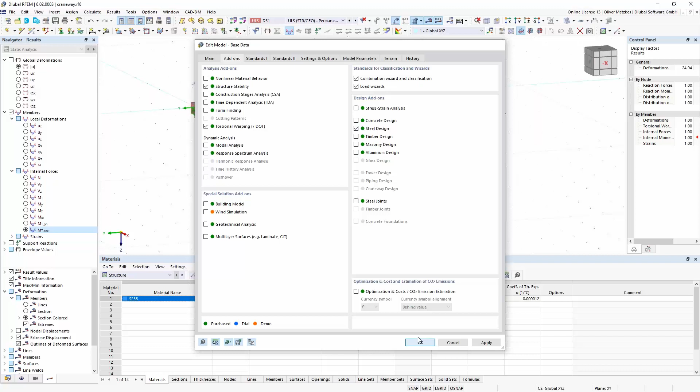I see that the add-on is deactivated again, so I will activate it, steel design, but I think all the settings have been made. Yes, okay, so this is the correct setting with this gamma M1 factor. And now I can also calculate my steel design.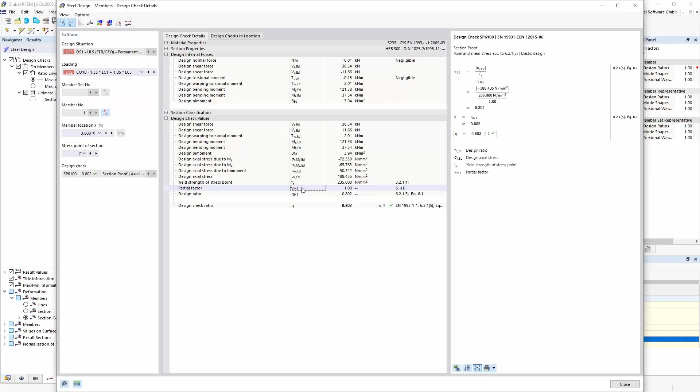Then I will see all the steel design checks with consideration of all the internal forces, including bimoment, secondary and primary torsion. If we look briefly at one of the design checks, for example the most governing one, we see in the results we are calculating the equivalent stress, considering the stress from bending moment about strong axis, weak axis, and also the axial stress from the warping bimoment. So all the necessary internal forces are included, and we also use now this gamma M1 factor for our cross-section design check, because it's meant as a replacement for the stability design.

Okay, so I think we have seen now how to consider the 7th degree of freedom on this simple example, and what we would need as an input. And now I think we can look again at our 3D model. So I will switch back to the steel hall that we had before.

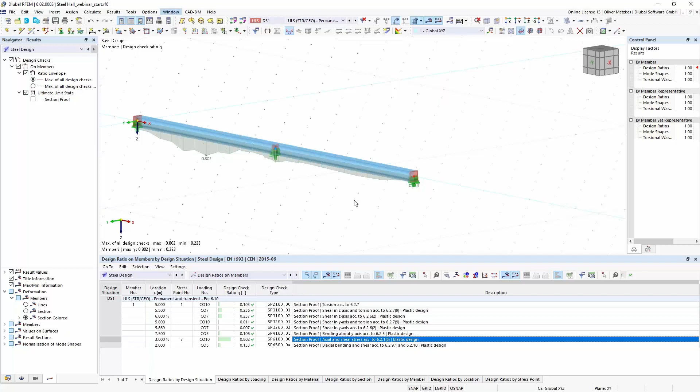And now we also want to check the lateral torsional buckling on this global model. So for the beam girders, we would now also expect to get these lateral torsional buckling shapes. So first we need to activate the structure stability add-on. We have it already, and also the torsional warping add-on.

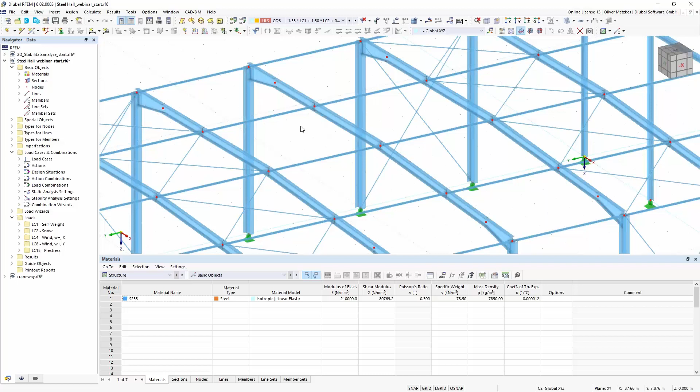Now I just want to give you some additional hints, because if we look at this model, as we have said, all the members are by default independently for the warping. So all the members are free at their edges for warping. And now we still want to see these beams as a continuous one, so that the warping can be continuous in the whole beam. Therefore, we would need to create member sets.

So that is the option if you have members which are not connected. If you don't have internal nodes, but real nodes, then you can still consider them for a continuous warping if you create member sets.

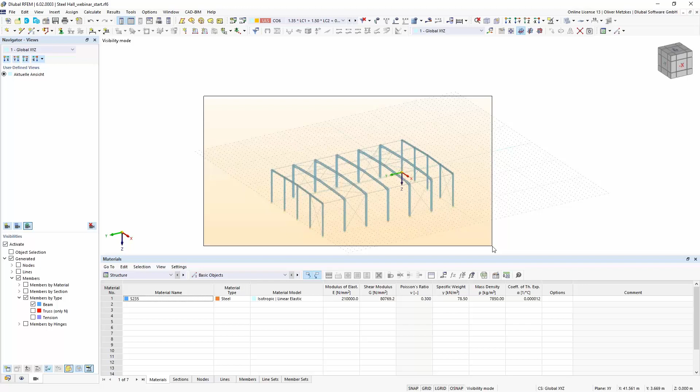So I will create the member sets. For that, I will activate my visibilities for the members to only get the beam ones. So then I can select all the frames easily, and I don't want to have these additional columns here. Okay, and I just right-click on the members, and I can here create the member sets.

It automatically recognizes that I have independent systems here, and it tries to create the continuous member sets. So you see, I can now easily create the member set for all the frames. Okay, so that is possible now, to consider those members also continuous in the warping, because that is the property of the member set object.

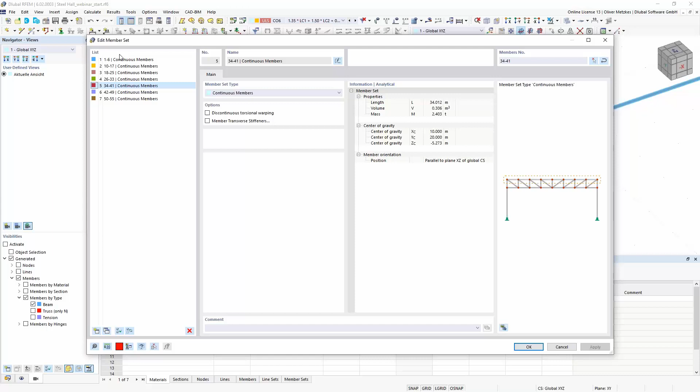If you don't want to have it continuous in the warping torsion analysis, then you could also activate this discontinuous torsional warping. But normally when you create a member set, it is meant to have it as one structural object, so you will have continuous warping for all the members which are connected in one member set. Okay, so that is the first important thing, that we can consider this beam as continuous one.

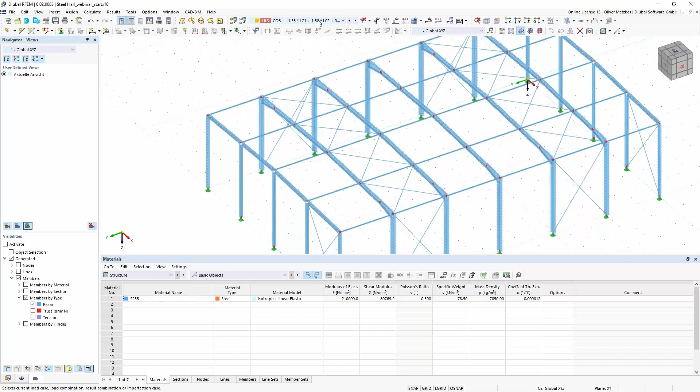And then we already also know that the load application point needs to be defined by the force eccentricity. So in this example, I just want to change the force eccentricity for this snow load, to also apply it at the top flange. For the 6 degrees of freedom calculation, it was not necessary, but now if I want to consider it in the warping torsion analysis, I also want to consider this eccentricity in the stability analysis.

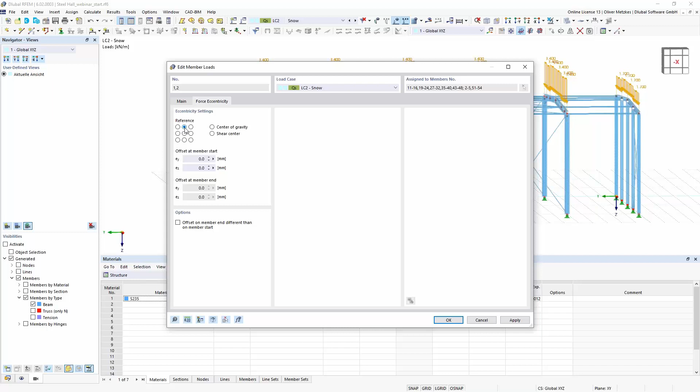So I just added my member loads and set this eccentricity value here. In this case, I can use this simple reference point because I just want to apply it at the top flange of the cross section for all these members. So I can use this simple reference point.

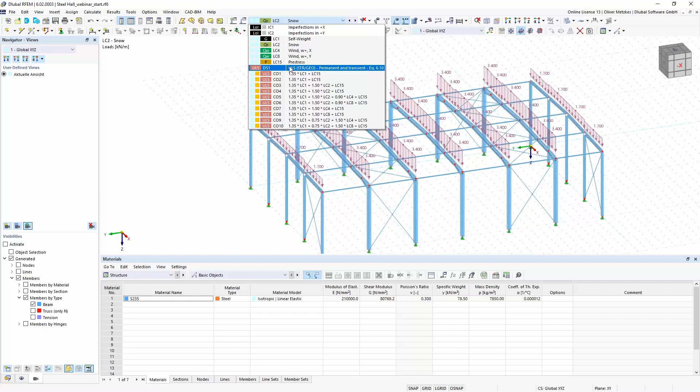Okay, so now I have changed those two settings, and I want to run the stability analysis. I think we still have it activated from the example before. So if I calculate my design situation number 1, I have my 10 load combinations, static analysis, and then stability analysis. And now I would expect to also get these lateral torsional buckling shapes.

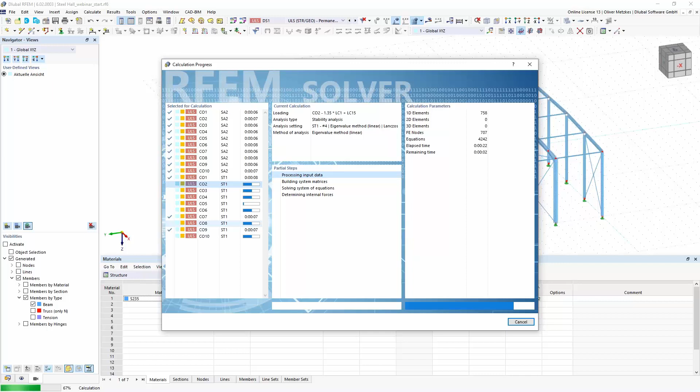Before, it was only the in-plane flexural buckling, you probably remember. Now I want to look at the most governing mode shape, which would be lateral torsional buckling. If we look at design situation number 1, the minimum critical load factor now is not 11, but 1.4. So in load combination number 6, in the results for the stability analysis, we see that the first mode shape is now correctly found as this lateral torsional buckling shape.

And automatically, as we are working now in a 3D model, the stiffness of all adjoining elements is considered. So already the bracings and all the couplings between the members are correctly considered, and so we get this critical load factor. So we can also do detailed stability analysis on a 3D model.

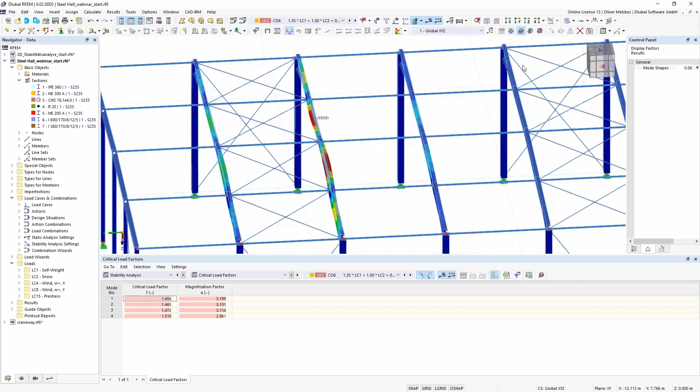For example, to consider also the coupling between beams that are not equally loaded, to also consider the stabilizing effect, you can see that the structure is considered. For example, in this example I changed the section of the bracing from a round section with 20 millimeters of diameter to one with only 10 millimeters.

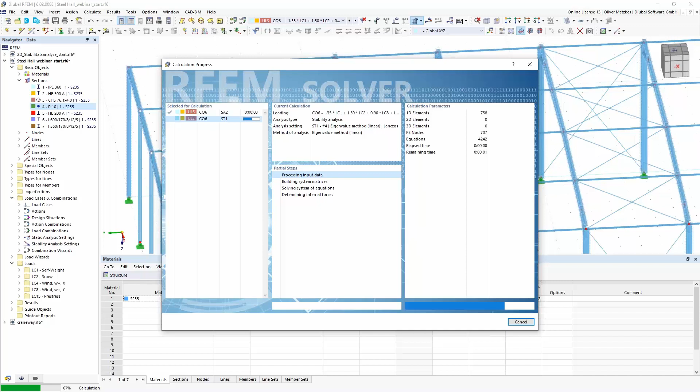So in this example, I will just rerun the stability analysis now with bracing that has a lower stiffness, just so that you can see what we will get as a result. In this load combination number 6, before it was this lateral torsional buckling between the fixation of the bracing. But now we have a lower stiffness, and it's not stiff enough to prevent this flexural buckling of all the frames. So now we have a lateral torsional buckling mode shape with critical load factor 1.1.

So the first one is now the most critical one with this lateral torsional buckling mode shape, not between the bracing fixation, because the stiffness is too low now. So we will have this global lateral torsional buckling here. You can see that this stiffness is directly considered for all the adjoining elements, and there's no need to calculate a certain equivalent spring stiffness, for example, in this 3D analysis.

So you can use this combination of the structural stability add-on and torsional warping add-on to also perform detailed stability analysis on 3D models with member elements. Okay, so I think those were the examples that I wanted to present with the two add-on modules. Now I can give back to Andreas.

Thank you, Oliver, for this nice presentation.